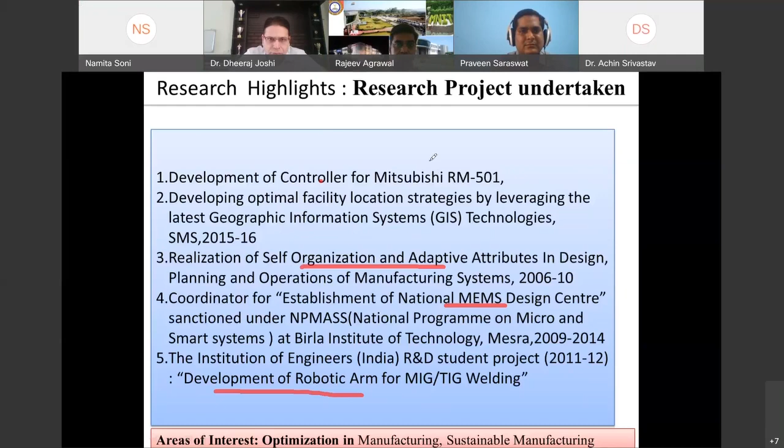So these were some publications I just wanted to highlight. Now my presentation outline will be: I will be giving how various countries globally are doing and how India is doing in Industry 4.0, and what are the various research scenarios and applications of Industry 4.0.

Now, during COVID we have actually seen a growth pattern. This is from a report published by Gartner, covering enterprise and automotive IoT. If you look across sectors, transportation is negative, as are automotive and consumer. On the positive side, healthcare, physical security, and manufacturing are positive. So manufacturing and the health sector are both being enhanced with the help of IoT.

Now let us try to understand how various countries are working and where Industry 4.0 originated. It started in 2011 in Germany — the first effort began there.

After that, the US started a program called Advanced Manufacturing Partnership, trying to develop an industry competitive ecosystem, what we call 6S: space, semiconductor, shale (energy), smart ICT, silicon, and sustainable talent pool. So from space to talent pool, they tried to make a roadmap for advanced manufacturing partnership.

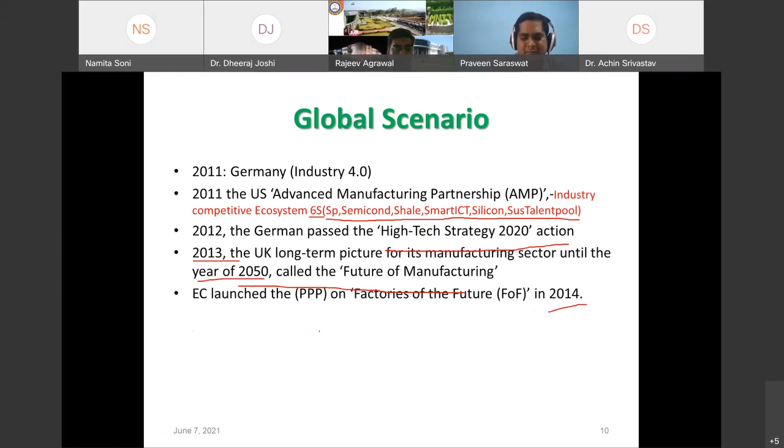In 2012, Germany passed a high-tech strategy action for 2020. Then in 2013, UK started the 'Future of Manufacturing' initiative looking ahead to 2050. The European Commission launched a public-private partnership called Factory of the Future in 2014. China introduced the Made in China 2025 strategy. Then in 2015, Japan came up with the Japanese Super Smart Society, emphasizing SMEs and the startup ecosystem.

Singapore, one of the developed countries, committed 19 billion for research, innovation and enterprise in 2016. These are the various countries working on this. So you may be wondering, where is India? India is not behind — India is also working in this field.

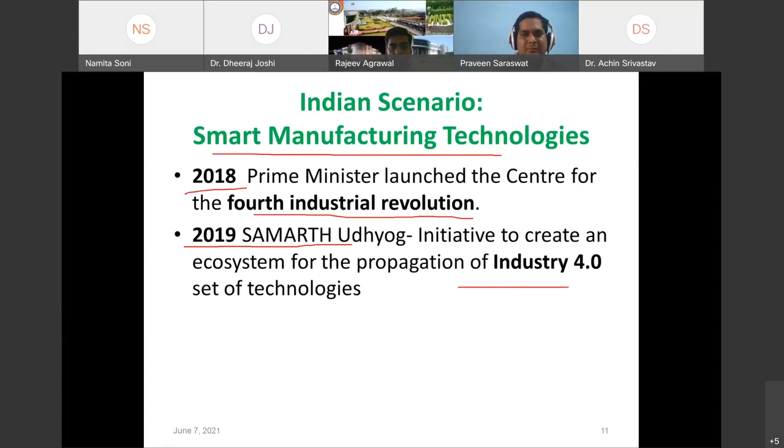Various Indian government departments have made initiatives. The first initiative is from the Ministry of Railways, which made a collaboration with a Coach Factory and also with IIT Kanpur, making the transition from diesel using Industry 4.0.

So their entire chain from design to production helps enhance productivity, enabling decisions on a real-time basis, minimizing human errors, allowing effective monitoring of resources and best utilization — what is called overall equipment effectiveness. You have to keep these words in mind while doing research or planning with Industry 4.0 in manufacturing: taking real-time decisions, minimizing human error, and monitoring resources. This was the first project, the first initiative by the Ministry of Railways.

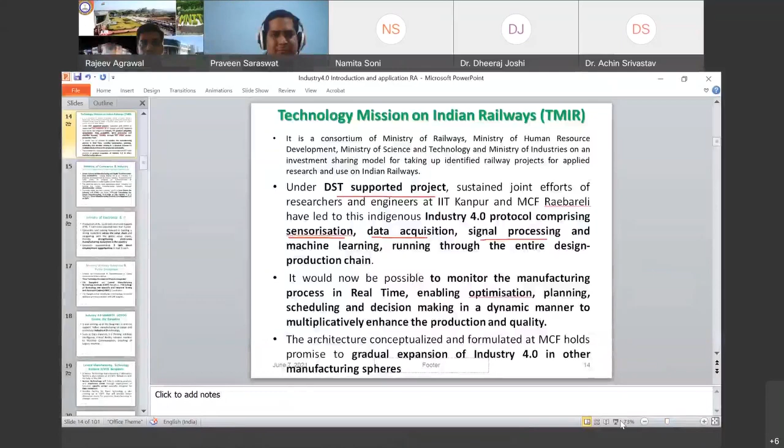I was talking about this project from the ministry, which has conceptualized this gradual expansion of Industry 4.0. Another initiative by Ministry of Commerce established a scheme called Smart Advanced Manufacturing Mission, Udyog Bharat 4.0, an Industry 4.0 initiative by Department of Industries, which will enhance competitiveness in the capital goods sector.

This initiative is basically for Indian manufacturing industry demonstration centers. Four demonstration centers have been established: first is Center for Industry C4I4 in Pune, another is IIT Delhi Foundation for Smart Manufacturing, third is IISc Factory R&D platform, and fourth is CMTI Bangalore.

Another initiative by Ministry of Electronics is looking for a strong ecosystem across the value chain by integrating a global value chain and strengthening the electronics manufacturing ecosystem.

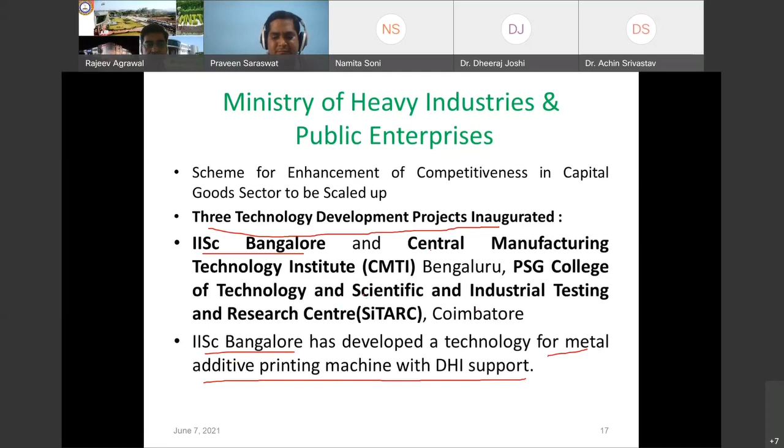Basically, they're doing Industry 4.0 initiatives in data analytics, 3D printing, AI, machine technology at CMTI Bangalore. They made a facility for fabrication technology, so anybody working in Industry 4.0 can access this facility with the help of Department of Heavy Industries.

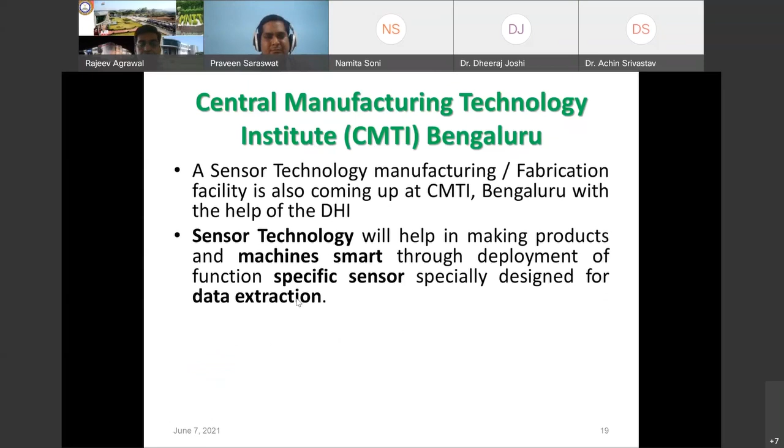This sensor technology is actually making products and machines smart for deployment, so they can design for data extraction. Another facility is for nanotechnology. There's a center at PSG College Coimbatore for welding robots and developing smart submersible pumping solutions.

Apart from that, the government has established 8 centers of excellence for technology development. First center of excellence at CMTI Bangalore was for shuttle-less rapier looms. Second, at IIT Madras for advanced technology for machine and production technology. Third, PSG Technology for welding technologies.

Another at Coimbatore for smart submersible pumping solution, and at IIT Delhi for textile machinery. These all pertain to Industry 4.0. At IIT Kharagpur for advanced manufacturing, and Heavy Engineering Corporation, one of the largest machine tool public sector units from India, for manufacturing hydraulic excavators with institutional support from IIT ISM Dhanbad. Another center of excellence at IISc Bangalore is for design development of 3D printing technology.

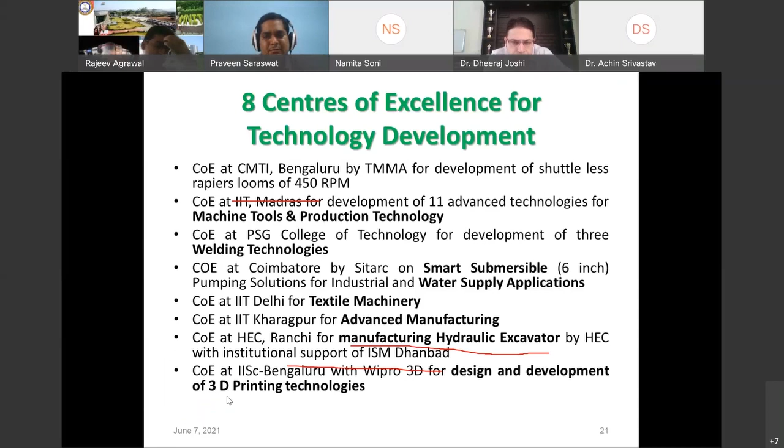Now Industry 4.0 is converting the digital factory with the help of 3D printing technology. So the government is advancing various smart manufacturing technologies. First is 3D printing with smart gel that changes shape when exposed to light, transforming the process using automation. Researchers are preparing tailored and wearable sensors with 3D printing using UV curable material.

During COVID, you can say touching less, worrying less, doing more - that is one of the objectives in smart manufacturing. How 5G and IoT bolster the manufacturing sector - these are the aims which the government has come up with and is advancing through their centers.

Apart from this, the Government of India has given awards for 12 sectors, including Industry 4.0. First was in 3D printing - one company has developed 3D printing with the capability of using carbon fiber as the raw material. One of the innovations, you can search it.

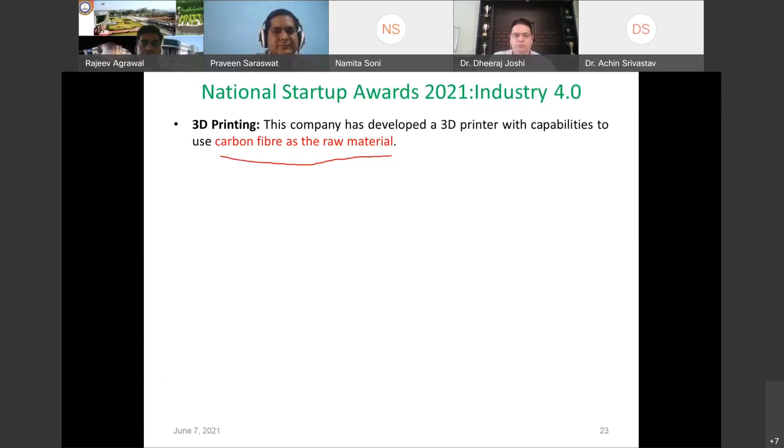Second was in AR wearables. It is enabling their experience without the need of writing any code, while distributing through cloud and web. No app installation is required.

But in the category of big data, this is actually AI, which is the need of plant engineers, able to predict equipment and performance issues in advance before they become significant. Fourth, given in the category of computer vision, where a wearable product is given to the visually impaired for living.

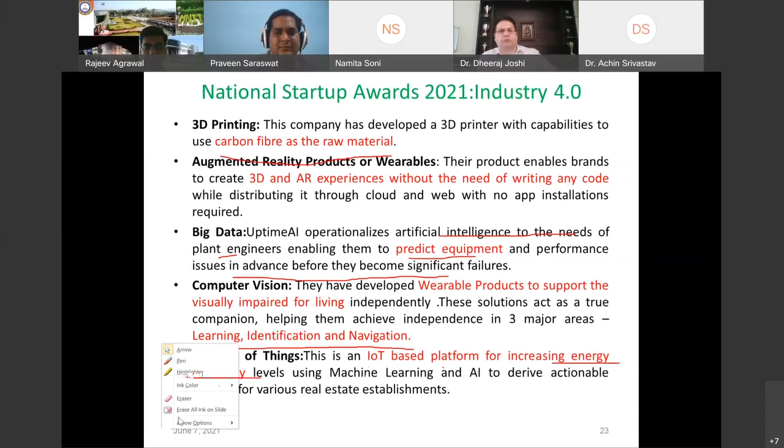Basically in three major areas: learning, identification, and navigation. Fifth is given in the area of Internet of Things, given in the area of energy efficiency, using ML and AI to derive actionable insight. And one application in robotics is the underwater remote operated vehicle - one of the incubators for underwater inspections.

These awards have been given by the Government of India ministries in various areas where advancement of Industry 4.0 is going on. Ultimately, there are two main things we can use: one is controllability, which is increasing, and flexibility, which is increasing. If you use this, where requirement is long-term integration, flexibility and controllability are required.

Now, till date, what you have seen, there are a number of levels which the productivity model has established. I'm just giving you highlights. First is level 1, which is 5S and Kaizen model, called continuous improvement - these are the hands-on levels.

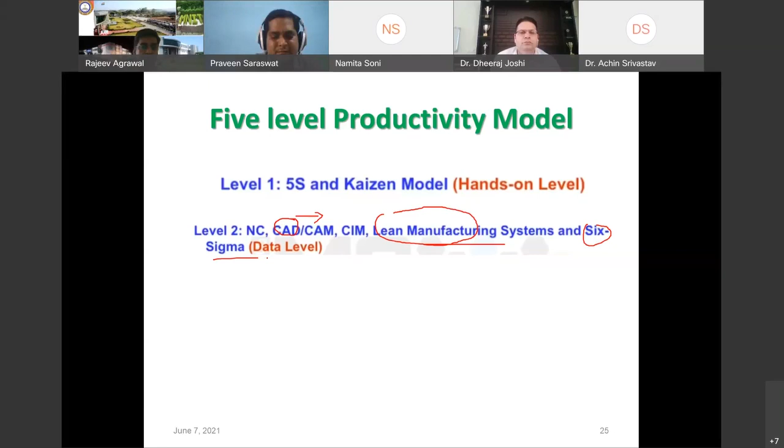Another is machine simulation, where whatever design you are designing has to be manufactured. Data level, which will be in Six Sigma and lean manufacturing - lean manufacturing is about reducing wastage, and Six Sigma is about reducing variation. You need to have data first, and then you work with this data to enable this.

Another label is how you're predicting by analyzing this data - so this is the information level.

And then with the help of this, you have to optimize and make the decision.

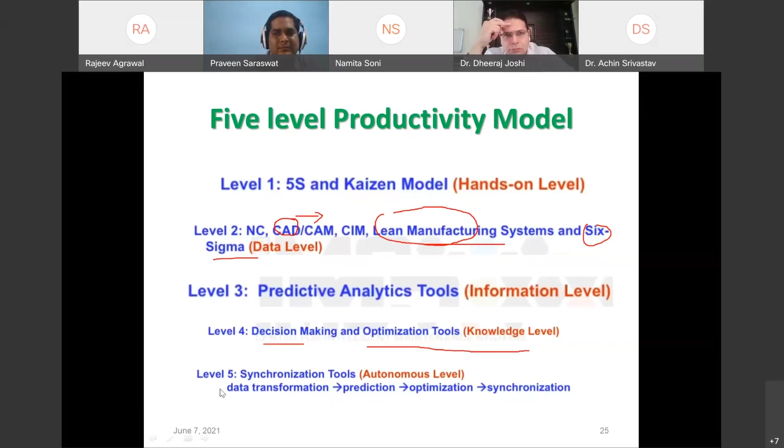Now, one very important thing is what is called data. Data is a very important entity in manufacturing. What was happening till date is, whatever problem in factory, whether there is a quality problem or an efficiency problem, you have to always rely on the experience and knowledge of your worker.

These people are having a certain craftsmanship. So they are actually building some relationship between what problem you are occurring, and with the help of their experience, they are trying to find a solution. So what was coming till date is craftsmanship, the perfect product with the help of knowledge and experience.

Now time has changed. Now, whatever problem is coming in factory, their machinist is actually designing the machinery, changing the various parameters to solve the problem, with the help of analyzing the previous data. They're predicting what is going to happen, how the tool is going to behave, and how the tool will be going to work efficiently. You have to use the Taylor tool life equation.

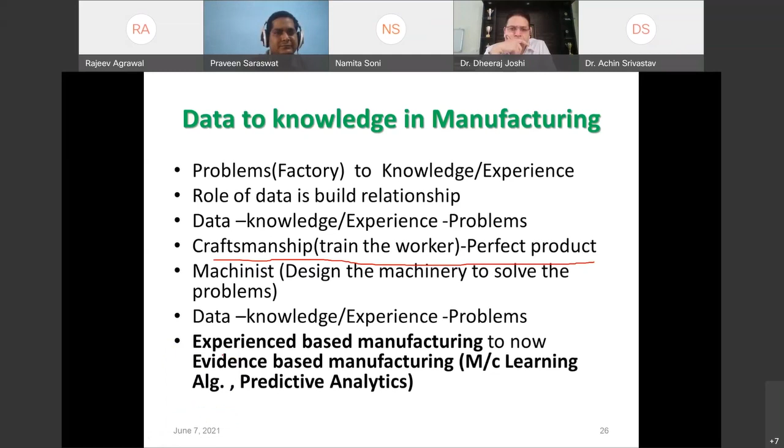Now you have a watchdog agent, which is predicting the machining hours, how much machining hours are left, and based on that, you are actually making that decision. So now the important thing which has come up is experience-based manufacturing now converted to evidence-based manufacturing, where the role of machine learning and predictive analytics has increased. Now, that is what is actually Industry 4.0, another word for which is smart manufacturing, which is coming into picture.

Now, previously what was happening is the customer is giving an order for 100 parts to make. So if he is making an order, for making one part there may be a number of steps required for machining - installation, setting of parameters, cutting tool, and running. So there are a number of steps required in one order. You have to trace each and every step, and every 10 seconds, data is being captured.

We can understand this is about single tracing in every 10 seconds, so you can understand how enormous the data has to be saved. And it is used for 100 orders or more, data is being used enormously.

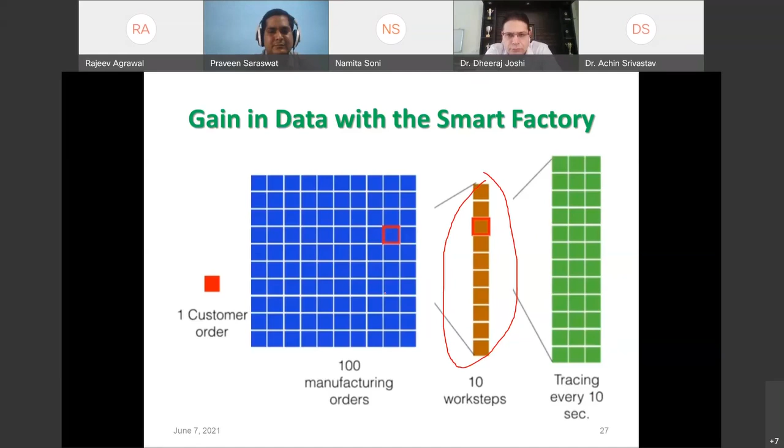So basically, this data is now becoming faster. It has to be direct - every entity is directly communicating with another entity. You are able to make decisions faster. And since it is multi-dimensional, you can actually trace your order very effectively.

Earlier it was ERP, manufacturing system, SCADA - that is business level, full factory level, MES in business level, factory level, and process level. But with the advent of Industry 4.0, every entity is communicating with another entity.

So basically, this data is produced at the sites. And what machine learning is doing, it is producing predictions, and AI will be giving an action. So I will be highlighting one case study in just half an hour, how AI is producing action. We are trying to handle three things simultaneously: data, machine learning to have an insight and a prediction, and to produce the actions.

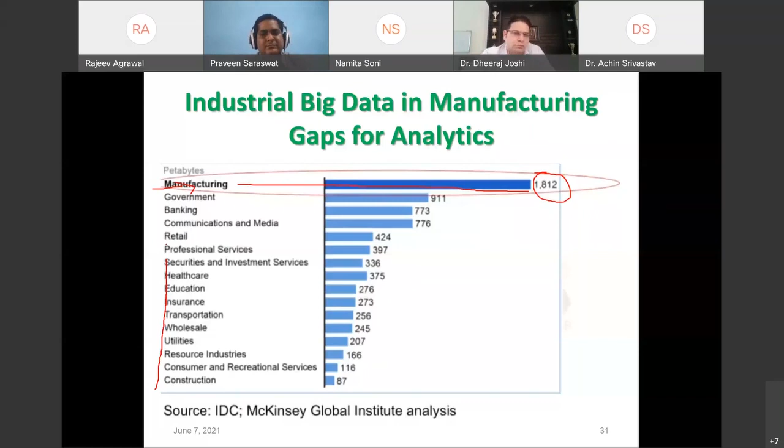Now we've talked about how data has been enabled or being executed. Now I'm going to show you how this data has been handled in various years.

Now, if you talk about the 80s, basically data quality was the main concern. We have a number of robotics and AI tools being used. It's not that AI tools are only being used now.

In the 90s, people were talking about reducing not only wastages but reducing variation as well. Lean and Six Sigma reduce both wastages and variation. Smart sensors played a major role.

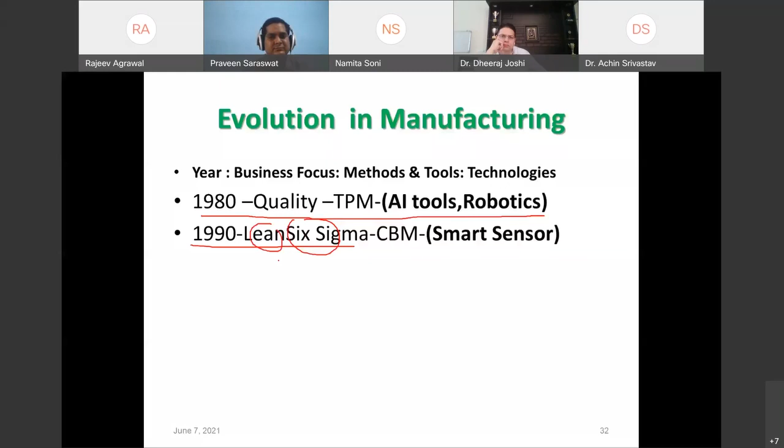In the 2000 era, another business focus was life cycle management, with prognostics as the key method technology.

Now we are in the era of 2010 onwards, where smart service, value creation, and predictive analytics are key. Here we have Industry 4.0, as I'm talking about the agent. Agent is a software which gives an autonomous action.

So now cybersecurity, digital twin - these are the various technologies enabling smart service and value creation. Now, these are the things we just talked about.

But if people are saying Industry 4.0, there must be some Industry 1.0. Industry 1.0 was basically about mechanical production machines which are powered by water and steam, which was in the 18th century. Earlier, production was powered through water and steam.

Another development, in Industry 2.0, mass production was the major highlight, powered by electric energy.

Industry 3.0 is about the use of electronics and IT - progress, autonomous action, self-acting.

Now, Industry 4.0 is where you can control your factory through an app, which is based on cyber physical systems, where the level of complexity is increasing, as we know data is enormous.

We need to take the data, save the data, and analyze the data. So from the 18th century to today, we have moved from Industry 1.0 to 4.0.

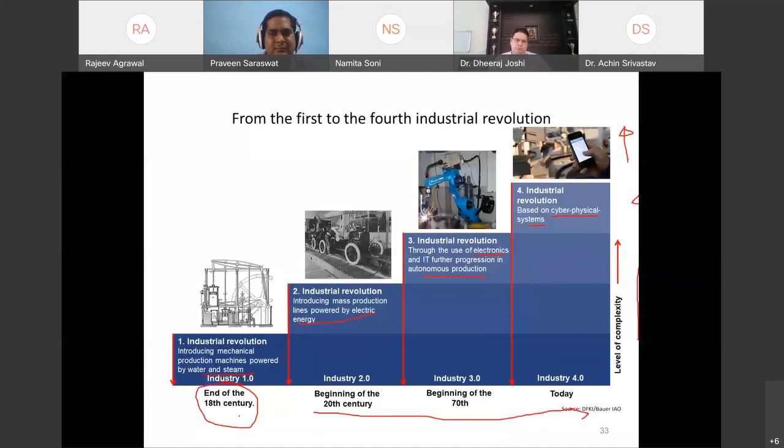If we talk about it, I can show you how today's factory is being compared with an Industry 4.0 factory. Basically, the main attribute taken is precision.

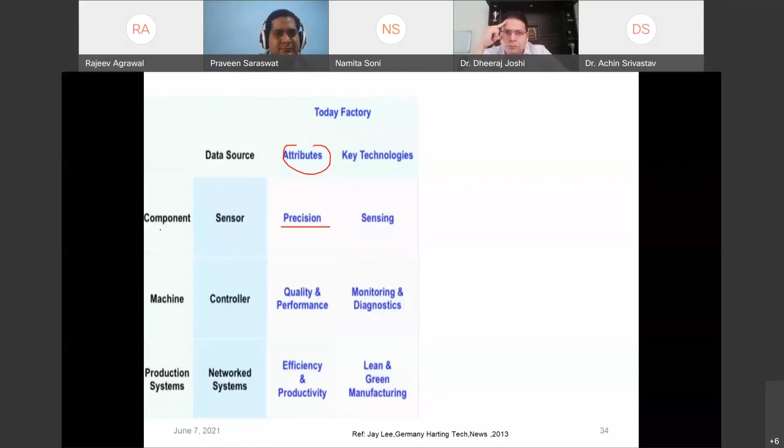the attribute is self-aware. So we are discussing degradation measurement. As I told, an agent is there which measures the cutting tool, how it has been degraded till date, and how much efficient machining it can do for the rest of the period available.

At the machine level, today's factory's attributes are quality and performance. Here in Industry 4.0, it's self-predict and self-compare.

So my case study will give you the highlight about this. Health prognostics is the key technology here.

Now, today's factory - one of the outputs is efficiency and productivity. If you compare efficiency versus productivity, efficiency is basically actual output upon standard output, and productivity is rate of production.

Here now, self-reconfigure, self-optimize. So you may have one machine tool, maybe a lathe machine, which can work as a lathe, which can work as milling, which can work as shaping, and which may optimize speed and depth of cut for requisite machining.

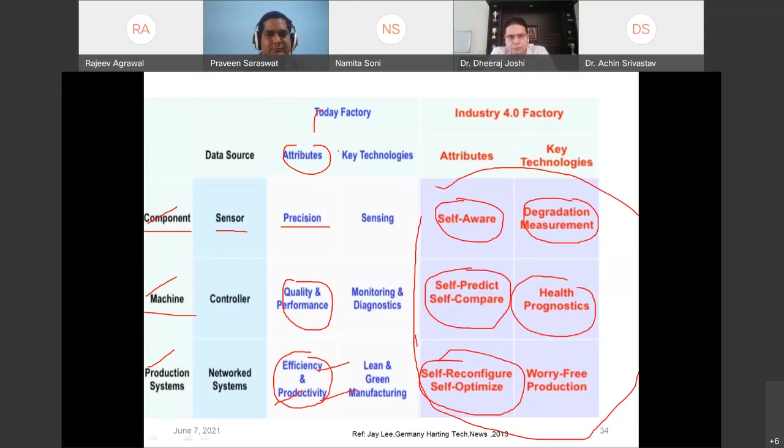Basically, if you talk about Industry 4.0, it's based on connectedness, where machines interact and analyze real-time data.

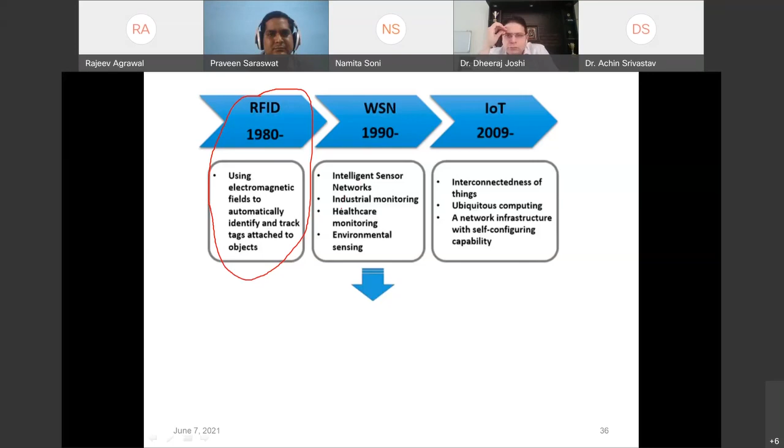Now, if you collate all the technologies and their evolution, there's one particular issue. Radio frequency identification was in the 80s, where electromagnetic fields were automatically identifying and tracking tags attached to objects. Wireless sensor networks came in the 90s, where sensor networks, monitoring, healthcare monitoring, and environment sensing were key. And now IoT, where interconnectedness of things, network infrastructure, and self-configuring capability has come.

So if you integrate this, you have a CPS. And finally, what we are talking about is Industry 4.0, which is about interconnectedness of things, ubiquitous computing. You have to have a self-configuring capability.

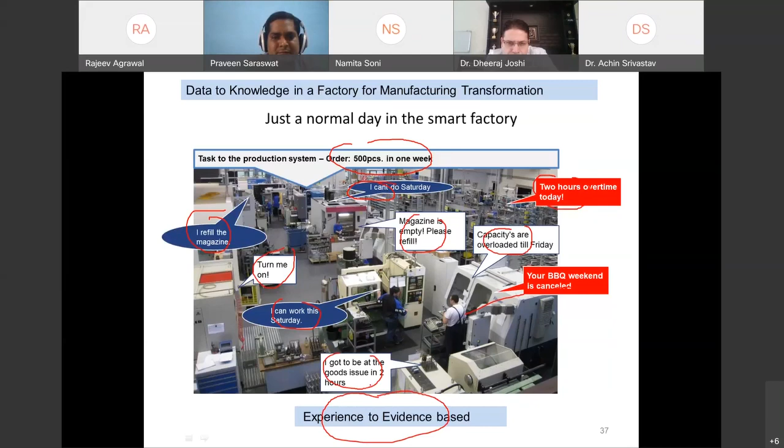Now I will be giving you a live example of Industry 4.0. Please hear this very patiently and try to take some points from this. This is one of the examples from Industry 4.0.

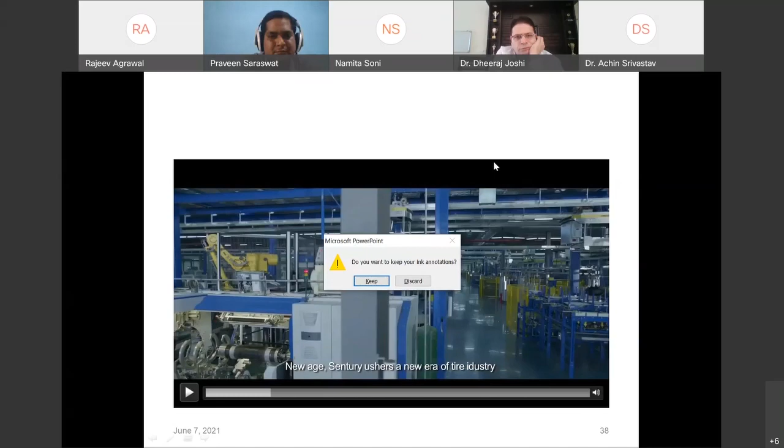Just one second, I hope you are all able to see. One second.

Sir, is there any audio attached to it? Because we are not able to listen to the audio with this case study. No issue, I got it. I got it, no issue.

Actually this particular one is about operation. I will be giving you the live demo of this. This is one of the applications for a tire factory, which is an Industry 4.0 enabled tire factory. I will be giving a live demo of how this actually factory is going to work. This factory is an Industry 4.0 factory, which is actually operating through Industry 4.0.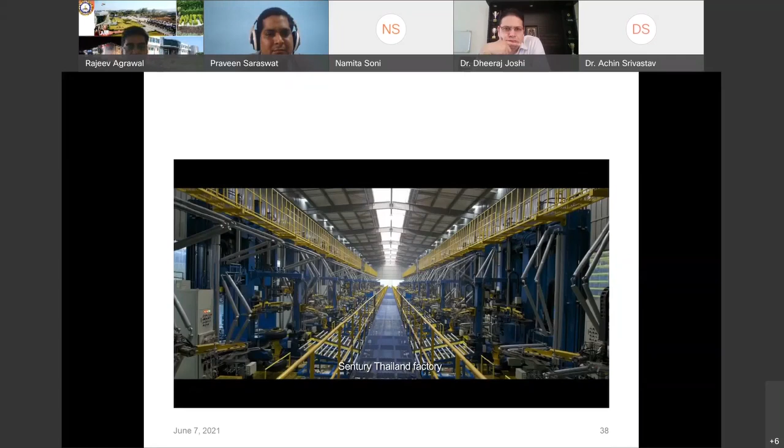So this is in Thailand, where tires are being produced, where no human being is involved, and where they are actually using all the latest technology. So if you talk about an advanced factory, we have a neighbor who is actually using it.

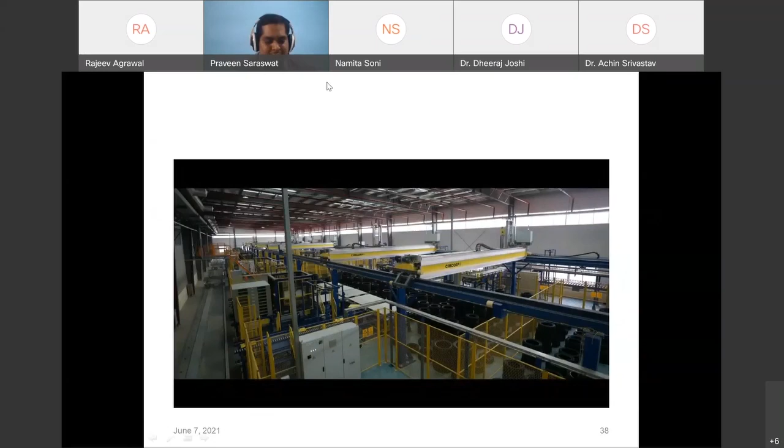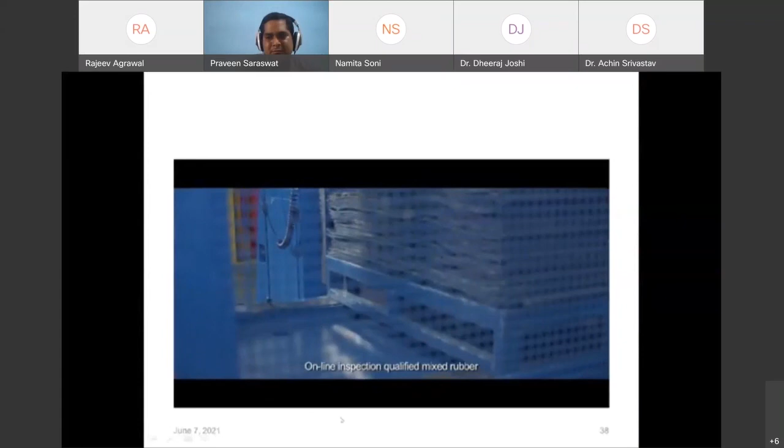Here is the whole process intelligence, from raw material to making mixed rubber. Every operation is being controlled and monitored through the network, from one location to another location. So the automation process and intelligent operation are being built.

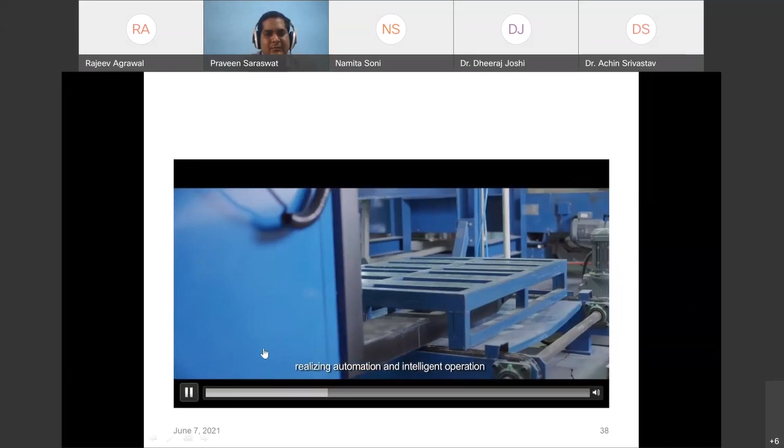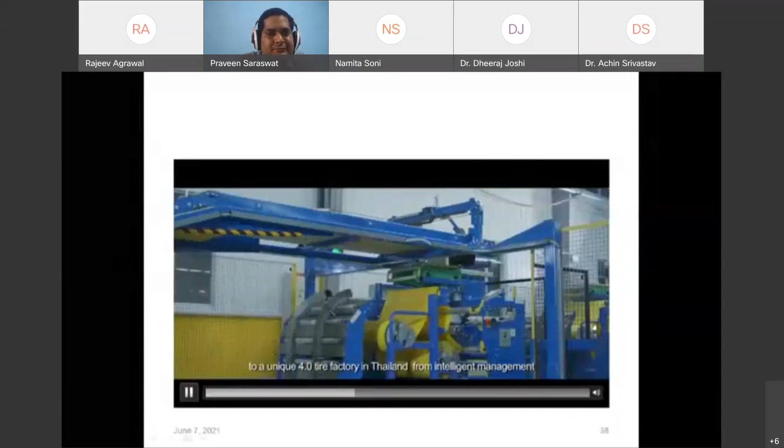Here you can see where intelligent manufacturing is being enabled, from rubber cutting to taking the mixture. So each and every process is automated. Now you see how this particular tire is being rolled, and now the tire has come into shape, and the testing is being done simultaneously as well.

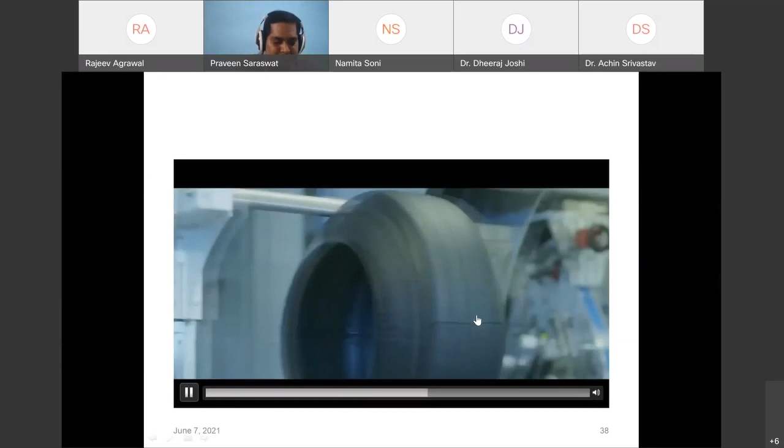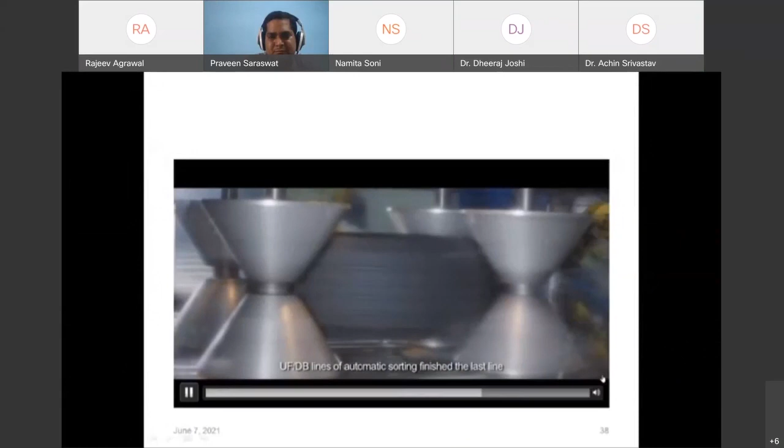Various testing is being done, then it's transmitted through various sorting, and the balancing line has been done. Ultimately the data has been filled, and finally you have a product, which is actually raw material converted to finished product. So raw material to finished product has been implemented, and information is being shared in each and every case.

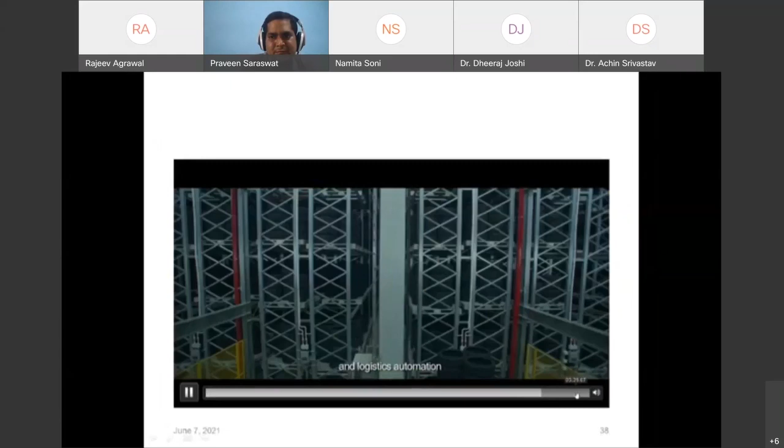As I told, not only design but logistics automation is also involved. Ultimately it's providing intelligence at each and every stroke, so they call it Tire 4.0. That was one of the examples which I gave. Since there was some data lagging, ultimately the point was to show how actually one factory has been enabled with Industry 4.0.

So basically, Industry 4.0 is not only converging IT, but it is converging OT, operation technology, to create a cyber physical environment.

What are the key areas in Industry 4.0 where people in manufacturing are working? The first is manufacturing operations. Second is overall equipment effectiveness and productivity. Third is predictive maintenance, and another is real-time equipment and process monitoring. I will be talking about a case study on this, and one of the key areas is automation. So these are the areas where Industry 4.0 is working in manufacturing, and real-time quality monitoring is one of them.

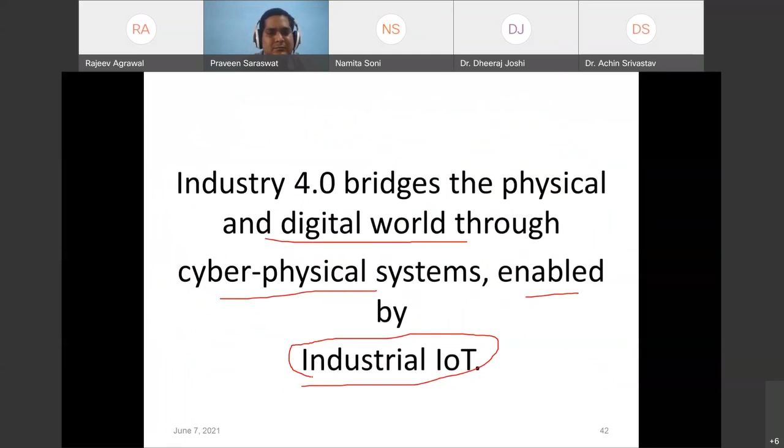How various manufacturing from single automated cell to reconfigured manufacturing systems have gaps, and how you can fill this gap. You can work on these areas. So basically, Industry 4 is bridging the physical and digital world through cyber physical systems, enabled by Industrial IoT. This is your FDP for this week.

In the next half an hour or so, I am going to give you a case study of one steel company, where a machine can predict failures and trigger maintenance process autonomously. We will be doing this, and there's another area where you can work: self-organized logistics responding to unexpected changes in production. This is one of the research areas you can work on.

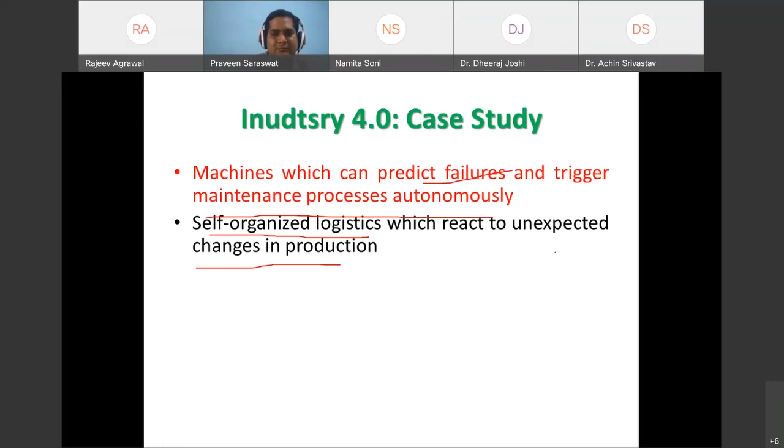So this is one company, Siemens, which has a plant in Germany, reported a 99.99885% production quality rate. That is one of the objectives in Industry 4 - to simultaneously get efficiency, productivity, and quality of 6 Sigma, which is 3.4 defects per million.

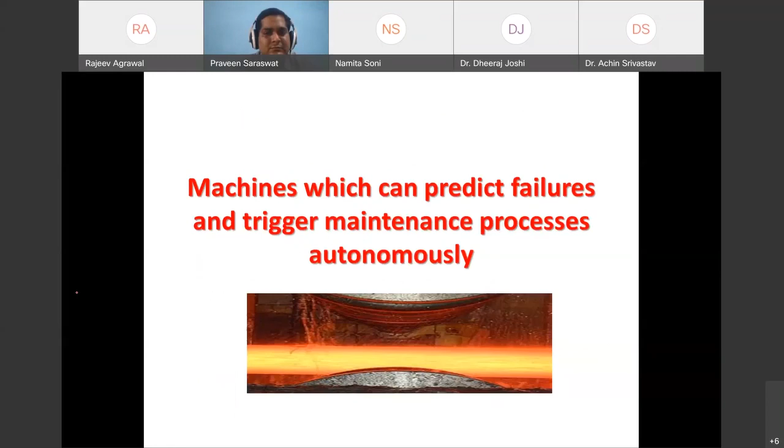Now, this is the machine I am talking about in the case study, which can predict failures and trigger maintenance process autonomously. Before that, I am going to give you a highlight of a new word you are going to hear now, called Jidoka, or automation with human touch. At the end of this talk, I will give you a new word where this research and evolution is leading.

So you may be wondering, there is Industry 1, Industry 2, Industry 3, Industry 4. Next, please go thoroughly through this case study.

Basically, self-diagnosis as a quality control measure among automated lines is referred to as Jidoka, where human touch is the main thing. So Jidoka basically allows the process to make its own decisions.

So there's independence in automation, and it has multitasking too, where instead of an operator sitting with each machine waiting and watching, one operator could multitask watching several machines. And as I told you, this increases quality and productivity.

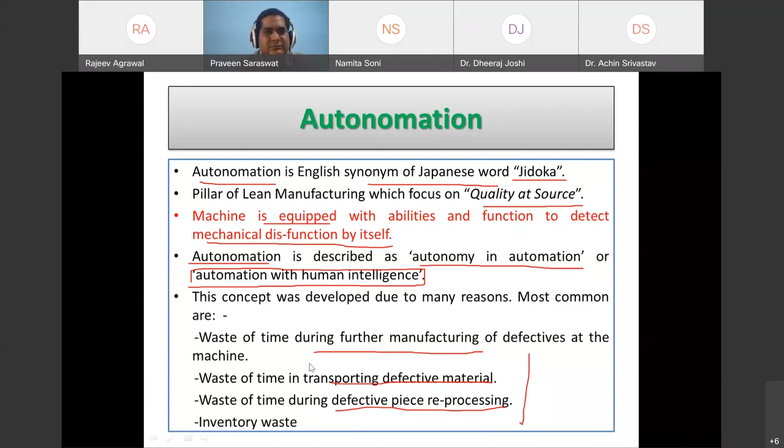Now, whenever considering any technology, you see two things: one is cost, another is time. So cost and time are the two pillars of anything.

So where cost is concerned with Jidoka, we have talked about machine separation, standardized work, Kaizen - these are the pillars of this. And here, in terms of time, Takt time and Muda are the pillars of delivering time. So that's the basic stability achieved with the help of this.

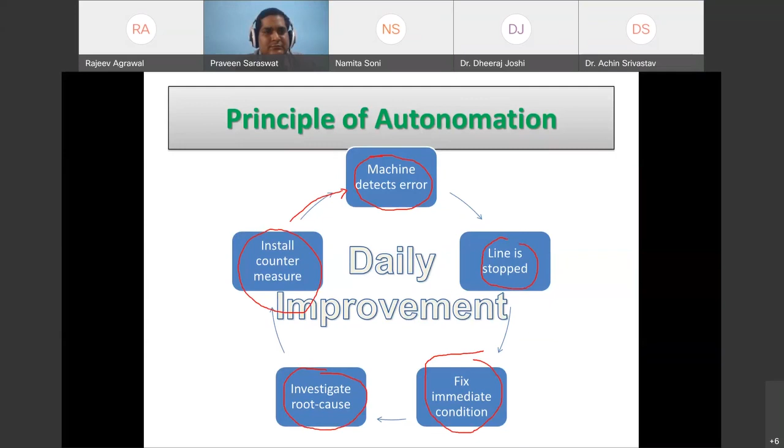Now, if you compare this with conventional automation - automation is about machines, Jidoka is about people. Manual process is sometimes easier but requires human supervision, which can multitask with human intelligence involved. In machines, the cycle completes until the stop button is activated, but here in Jidoka, detection of error is autonomous.

Defects can be produced in mass due to machine malfunction. Here, machine crashes are prevented by auto stop, and defects are avoided. Diagnosis errors are discovered later, and then the defective part helps find the root cause of why this defect has occurred, where errors are discovered and corrected quickly.

So the key takeaway is automation is about supervision, and autonomation is about human intelligence.

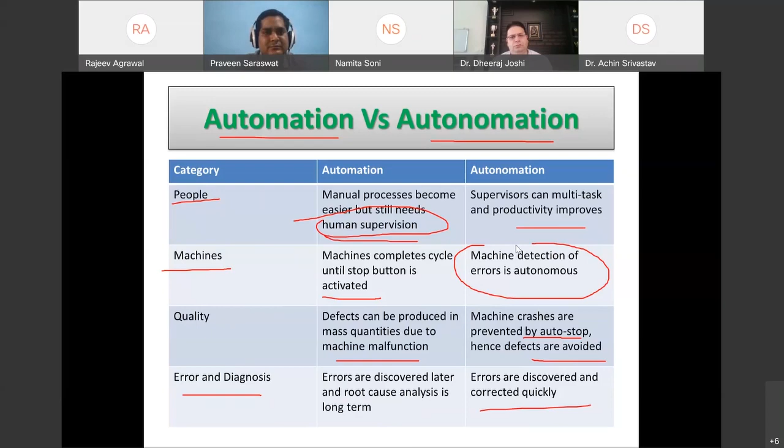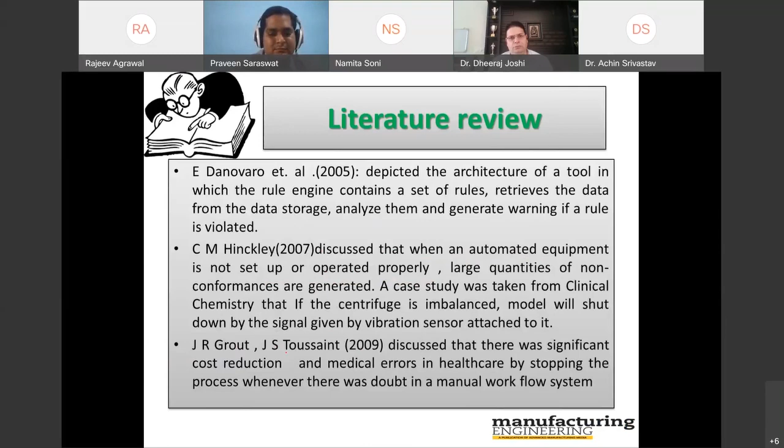As I told, this study was implemented at a steel company where the long-term benefit of automation in an automated line was examined. A review was done on an image acquisition system for identifying non-conforming material. This literature review continued for generating warning rules, automated equipment operation, cost reduction, medical errors in healthcare, and so on.

That has occurred. A research team member visited one steel company and did an exhaustive literature review, finding very few applications of soft computing based tools in the automation area of research. That is the first research gap identified. The second research gap is that relating machine intelligence to automation was not found out.

After that, the process was laid out: identification of a quality related problem where automation is an appropriate tool, then development of a standard automation approach with the help of soft computing tools to enhance machine intelligence. This was applied in industry and finally simulated and applied in a control system. The work plan was laid out like this: literature review, identification of research gap, visit to factory, then development of automation approach, and finally simulation. So you can see how the problem has been handled, tackled, and solved.

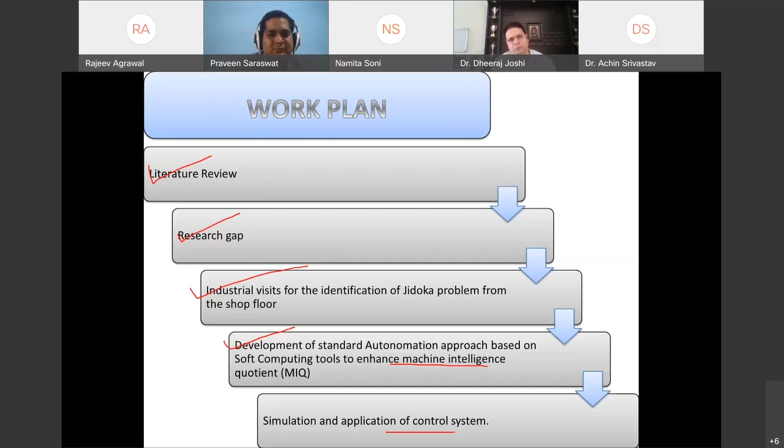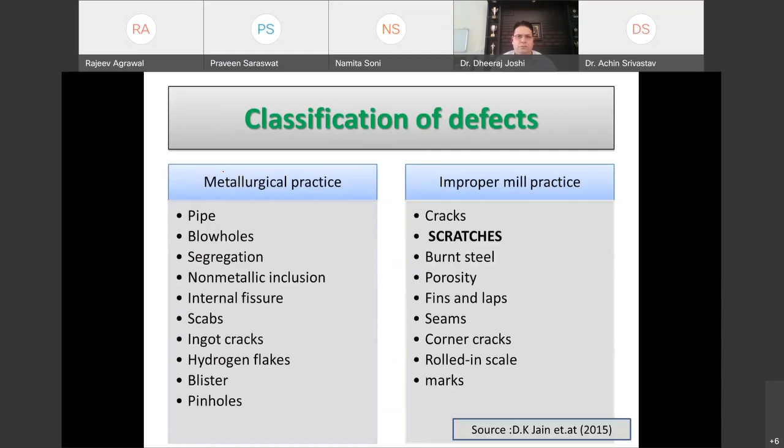Defects were classified into two major areas: metallurgical practices and improper mill practices. In metallurgical, there's pipe, blow hole, and segregation. Whatever roll was produced was inspected, and these defects were classified into these two major areas: metallurgical and improper mill practices.

In improper mill practices, scratches was the one defect that this particular quality issue tackled. So out of metallurgical and improper mill practices, this scratches issue has been tackled.

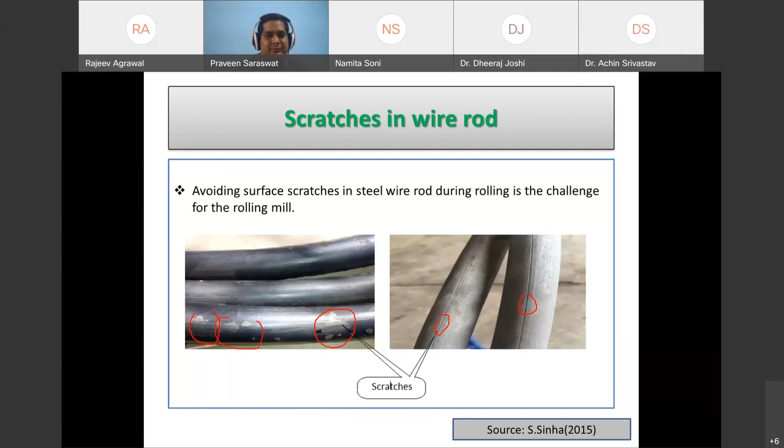The rolling mill was thoroughly examined. If you see these scratches, this is the rolling mill where you can see the wire rod has got scratches here. These are the scratches which were coming up. Whatever product is being made through this wire rod, the product also has scratches in it. So the final product was also analyzed for these scratches.

This was analyzed to understand why scratches occur during rolling, because the billet goes through various paths: box pass, oval pass, round pass, the rolling direction, and the final pass has got this pass.

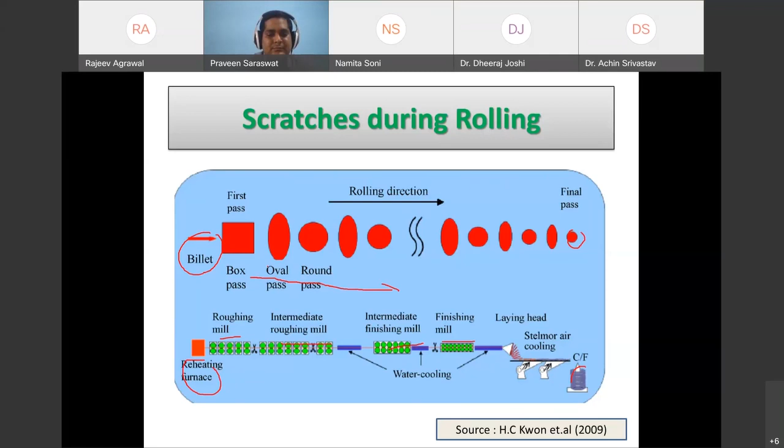The wire rod goes through various processes: roughing mill, intermediate roughing mill, intermediate finishing mill, and various other mechanisms. After analyzing this, three major reasons came up for why scratches occur.

The first was speed difference, second was impact force, third is temperature. Now ductility of the bar is affected by temperature and the reheating furnace, where ductility is directly proportional to temperature. So speed difference, impact force and temperature were the three major issues which came up.

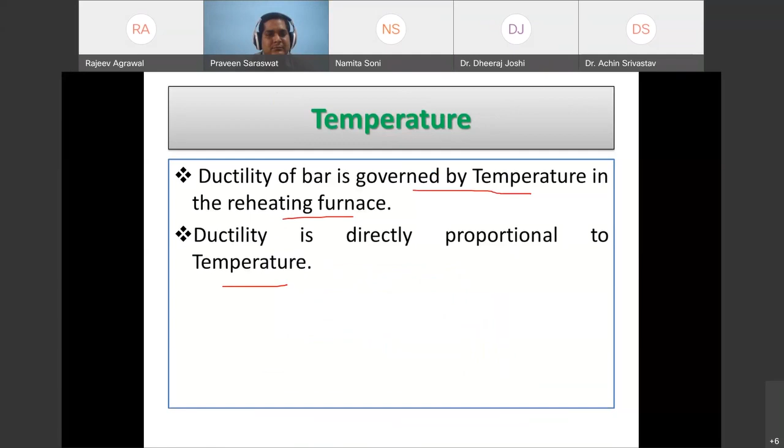Now the question came, how to avoid this? So for avoiding this, we have to make the system autonomous. For that, fuzzy logic was used to increase machine intelligence. There are many issues, but I'm going to give you the very basic ones.

It is rule based, if x and y. So if input 1 and input 2, the output may be this or maybe this. You may have a number of outputs based on interpreting the fuzzy inference system. So we need to solve the control problems.

This is the fuzzy logic controller, which has an input of temperature difference, if any, or any impact force deviation. It may have two outputs, meaning a light which will give an output in terms of a warning signal, or it may give a signal to stop.

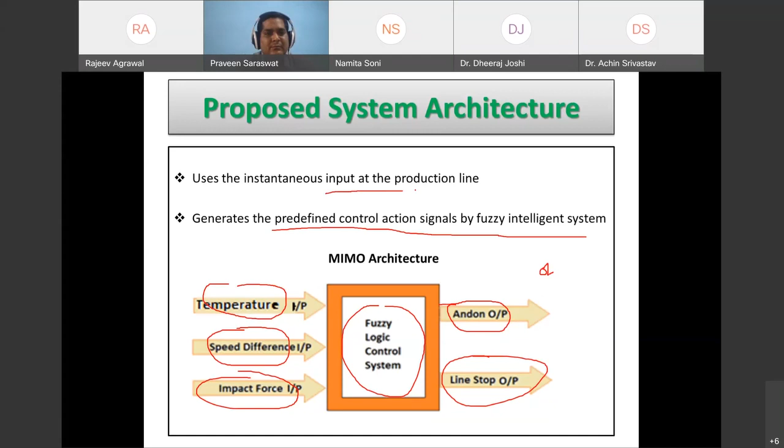So my question may arise, why fuzzy? And what is fuzzy? Fuzzy handles crisp values, and it has some membership function. That is called fuzzification, and it goes into the inference engine where if-then rules apply. Finally, defuzzifying gives a crisp value which comes in the output.

So in a nutshell, you can say that's fuzzy logic. But why fuzzy? Basically, in fuzzy logic you can embody human thinking into the control system. It can emulate human deductive thinking.

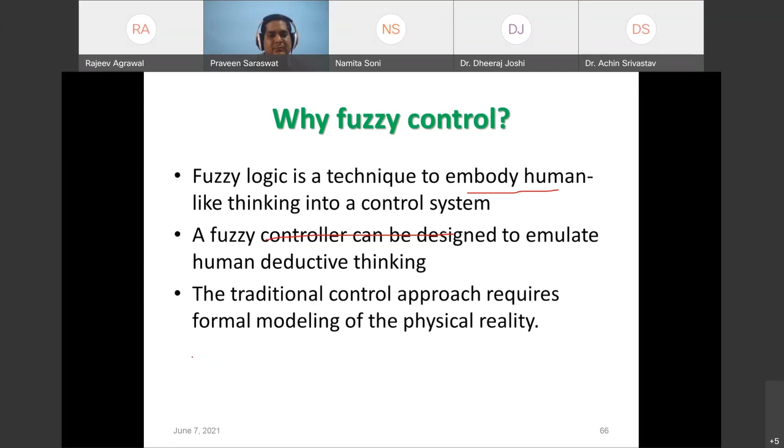Traditionally, if you need to solve problems, you may require formal modeling. For a traditional control approach in a real life industrial problem, formal modeling was one of the issues, since the problem cannot easily be represented by a mathematical model. So if you are using any soft computing tool for enhancing machine intelligence, you need to diligently justify why you are using this technique.

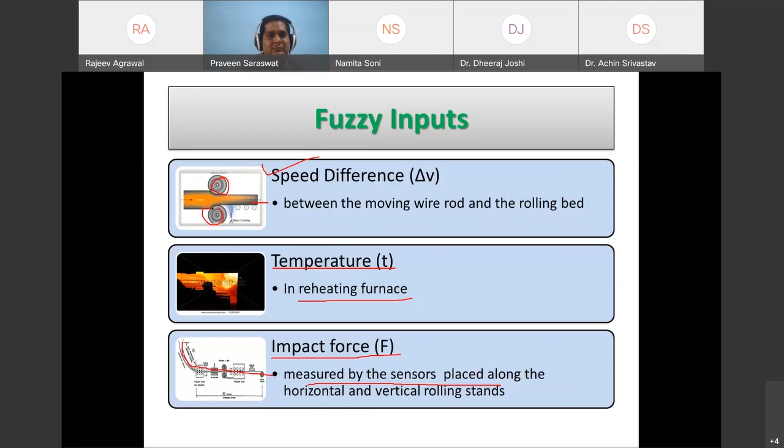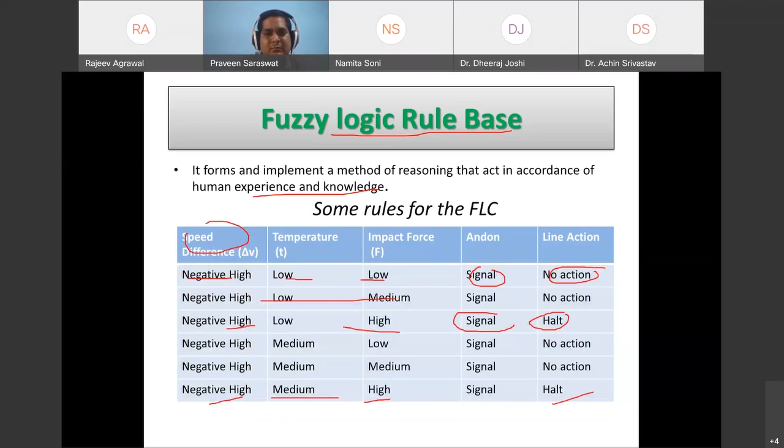We just came to know how this fuzzy input and fuzzy logic rule base has given and how output has been recorded. This programming has been made in MATLAB with speed difference, temperature, and impact force, where Andon and line action also have two outputs. So there is some data which I am not going to give you the details of, but I'm just trying to show you how this output is being shared. So that was one case study.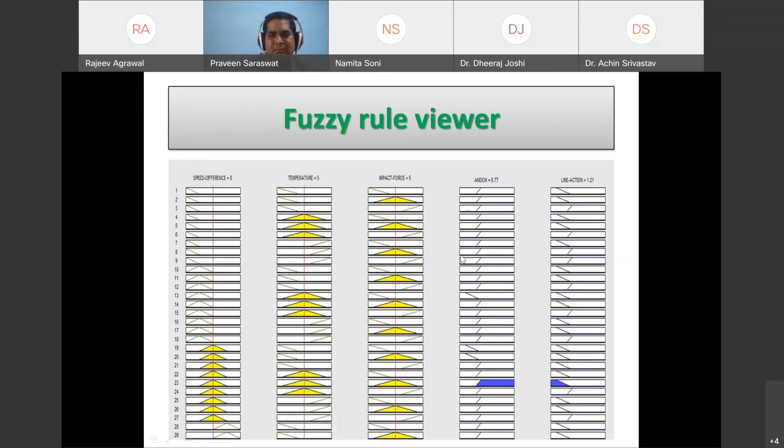Which my team actually implemented, and that is implemented. And now, for the real machine learning application, where they're trying to make all the operations enabled through intelligence of humans as well.

Now, whenever you are starting any research or you want to write any paper, you have to do bibliometric analysis. So you may do a systematic literature review if you have certain questions in your mind. So this was the bibliometric analysis on Industry 4.

Now if you see this, as I told you, 11 was the area where Industry 4 came. Now from 12 it's coming to peak, so 20 is the peak. Since we are in an earlier stage, this total data, once 21 is completely passed, will surely increase. So documents are increasing year by year, so more and more research is working in this area, Industry 4 area. That is the first thing.

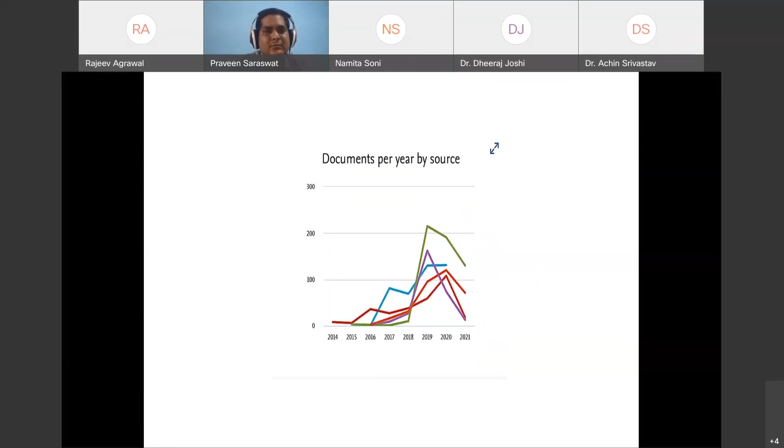So there are various authors, you can actually see the authors who are contributing to this. More and more papers are being contributed by these people. You can see how these people are working, which organization they actually belong to. They are affiliated to various organizations.

Now Germany is number one. Yes, they started Industry 4, so still they are number one. Then Italy, United States, China, and we are also not far behind, so we are in the top 6. So our researchers are also working in the Industry 4 area.

Now, there are a number of different types of articles. If you see the most common article types, there are book chapters, conference review, editorial, note, short, book, articles. There are conference papers as well.

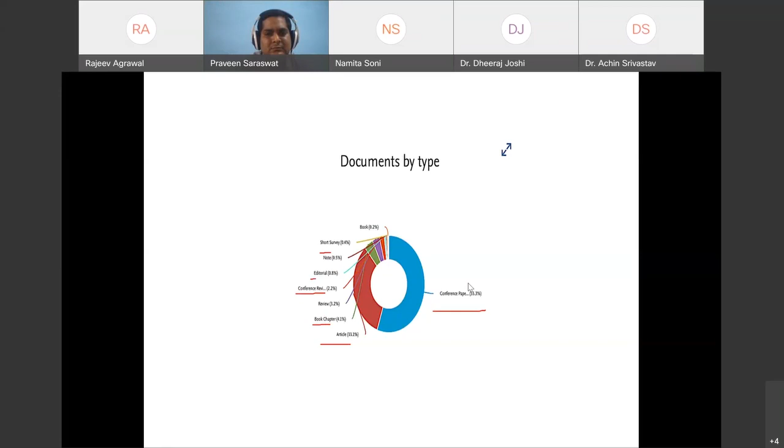These are various countries. As I told you, this is one database, Scopus. So Web of Science database is one, another is Scopus database. So a number of databases, whenever you do any kind of literature review, you have to take all the databases and then diligently take the decision. So more or less these 4 countries are coming into the picture.

That was the bibliometric analysis, which is the 4th information. There are a number of references being used in these case studies, I have just highlighted them here. Now, I am just going to give you...

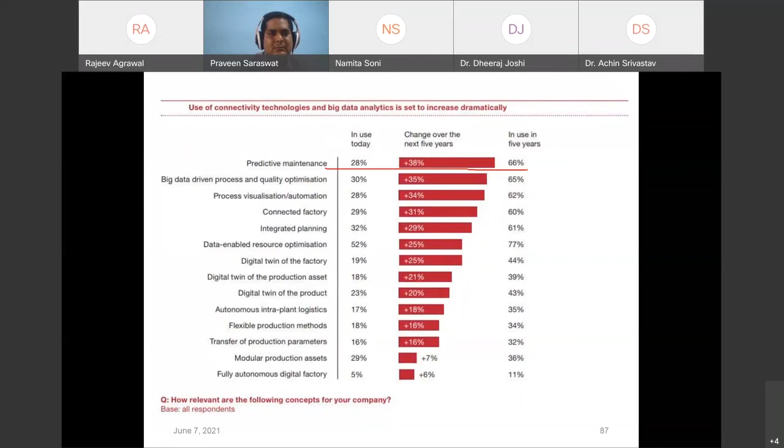The connectivity technologies and big data, which has been used dramatically. Now, what are people actually using? If you see predictive maintenance, for the next 5 years, if you want to do research in Industry 4, predictive maintenance is one area you can take, where this is going to develop or expand. So that is one area. Big data, quality optimization, that is another area people will work on.

Then visualization, automation, factory connected, integrated planning, data-enabled optimization, digital twin. This is another word which is now going to become very popular. Digital twin production assets, autonomous intra-plant logistics, autonomous digital factory. These are the areas which are coming up, and where you can actually do research.

So modular production assets. As I told you, modular is one word where one production asset means machine tool. I talked about reconfigurable machines. Earlier you wanted to do turning, so a lathe is the machine you are using. If you wanted a shaping operation, then a shaping machine. So a modular machine may be able to have a number of machining operations. That is actually the word which is called modular production assets.

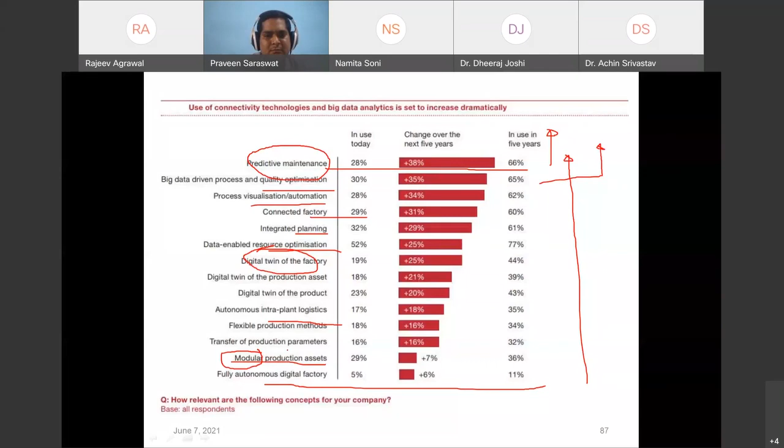This Industry 4.0 talk is basically giving you an overview of all the global countries which are doing this work, and how Indian government industries are working. They have established various centers where you can actually access their facilities.

Ultimately, if you want to do the work, you need to identify the current processes, which I have highlighted with the case study of the steel industry case study. I have highlighted the scratches which will be coming, there are number two categories with scratches, and I have highlighted the scratches caused by improper mill practices.

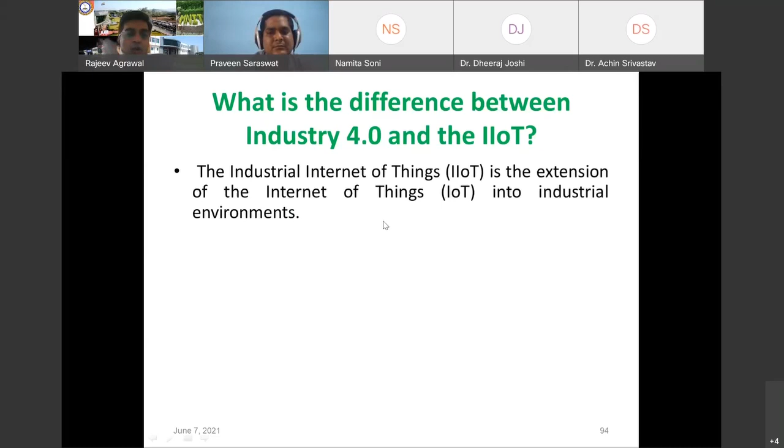IIoT is a component of Industry 4.0, and basically it is an extension of Internet of Things into the industrial environment. So Industrial Internet of Things is the extension of Internet of Things into the industrial environment. IIoT solutions are part of the cyber physical technology which is defining the fourth industrial revolution.

Now I'm giving you a very good takeaway answer, which is called additional solutions such as additive manufacturing. I'm getting very good answers from all of you - digitizing business processes and advanced control systems. So IIoT is a part of the cyber physical system, which encompasses additional solutions. Now, IoT with additive manufacturing is a solution for Industry 4.0.

So for manufacturers this is translating to improved sustainability, less downtime, and more profitability across the factory floor. So they want their components to be used for a longer period of time without affecting future performance.

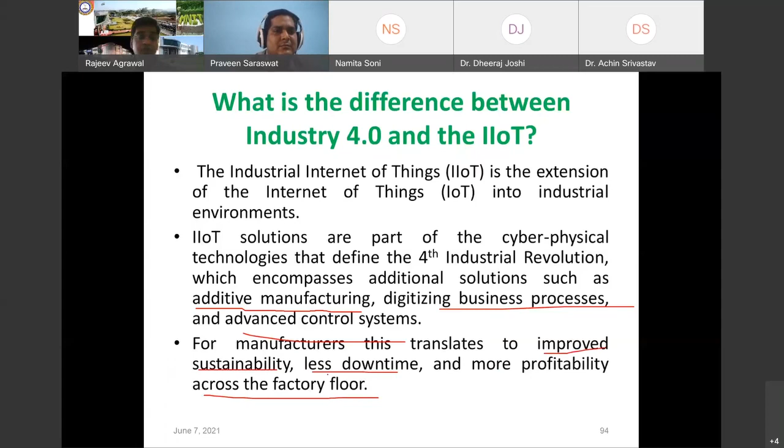Now I'm giving you some remarks on how different governments are working on investing in people in organizations to develop future ready capabilities of industry. I must congratulate ATAL AICTE, where under the banner of ATAL, they are organizing courses for disseminating knowledge, and IoT is one of the knowledge, Industry 4.0 is one of the knowledge which is being disseminated.

The Malaysian government has implemented one program called Education 4.0, which is in line with the fourth industrial revolution. They are giving education with the capabilities or competency required for digital driven industry. That is one program, Education 4.0.

Now, this course is about IIoT, and in line with what you are hearing in this talk, I am going to give you another heading, which is the buzzword called Industry 5.0. Some may have heard about it, some may not have heard about it. This is the greatest advance which is now coming up, which involves the interaction of human intelligence.

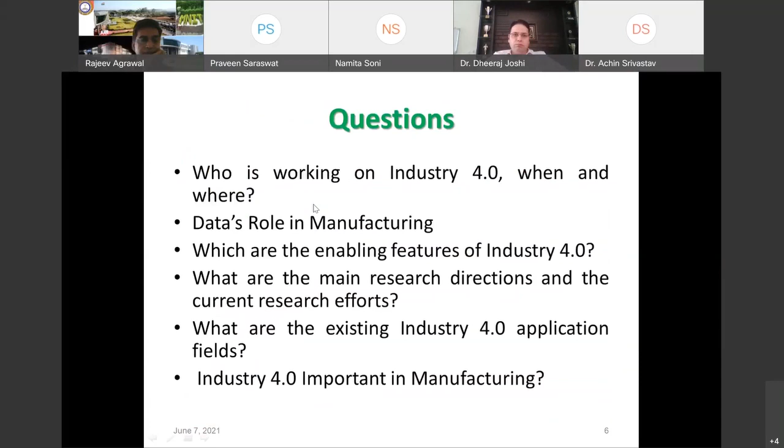I will give you one example - one of our national awardees who has developed an AI tool. I will show this. They developed the tool without writing any kind of code. People are working in this space with different technologies. This one offers a 3D and AR experience without the need for code, for AR and wearable products - this is actually what people are working on.

Now, data security is obviously one issue where blockchain is predominantly being used. Now another question is Industry 5 is totally dependent on cloud. Yeah, whether Industry 4 or 5, your data will be in the cloud. Obviously, cloud is the technology where the data is being...

So I will be seeing another chat box. What are the risks of Industry 4? As Professor Aseem Tiwari, I will be giving the same answer, as he has highlighted the same thing. You have a fire, so there are advantages and disadvantages of fire. So you have to diligently use that. Same thing with Industry 4 - you need to have two things together: efficiency and productivity.

Sir, will you please display again your slide where you had shown your research area, open to future potential PhD aspirants? Because one of the objectives of this FDP is to have a common platform where researchers and academia can meet, so students or future PhD aspirants can take note of that slide - it was shown very quickly. Yes, this one. It was the last 3, I guess. So participants who are really interested in these areas can take note of this and interact with Professor Agarwal even after this FDP.